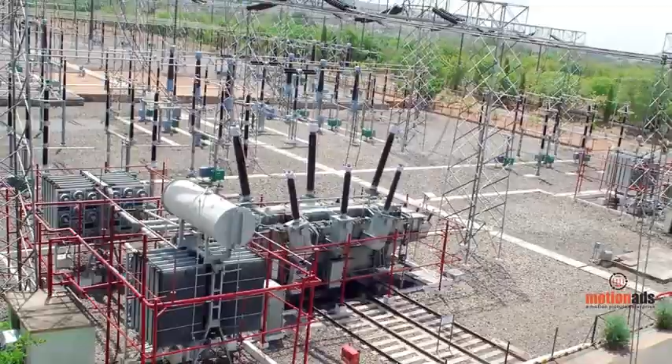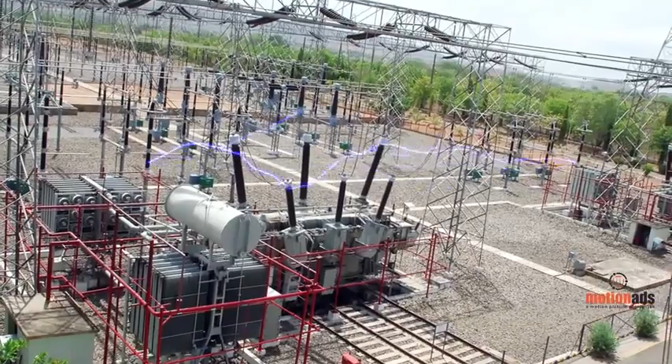India has made spectacular growth in the power sector after independence. Power generation and transmission have increased several folds and are expected to increase exponentially in the future. The Modern Group, realizing the potential of the power sector, decided to invest in this sector to cater to the country's needs as well as international demand.

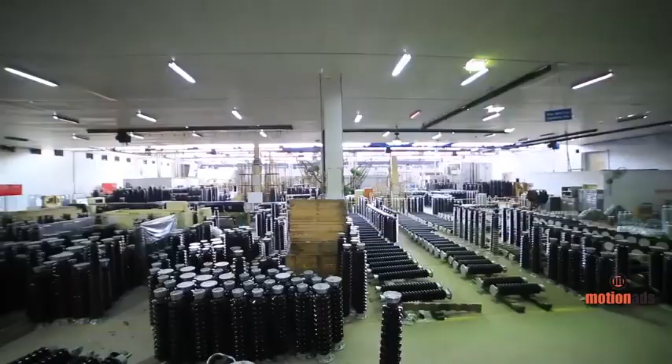Modern Insulators Limited was set up at Abu Road, Rajasthan by the Modern Group in 1985, in technical collaboration with Siemens, Germany, a world-renowned company in the power sector for manufacturing high voltage and extra high voltage vitreous porcelain insulators. Today, Modern Insulators is a leading manufacturer of porcelain insulators in India and competes with the best in the world.

Modern Group is one of the leading engineering and textile industrial groups in India, which emerged on the corporate scene in 1973. The group, led by Mr. Sachin Rankar, has 4 manufacturing divisions: Modern Insulators Limited, Modern Terry-Towel Limited, Modern Denim Limited, and Modern Foundry Iron and Aluminum Metal Castings. The Modern Group has a sales turnover of approximately $100 million.

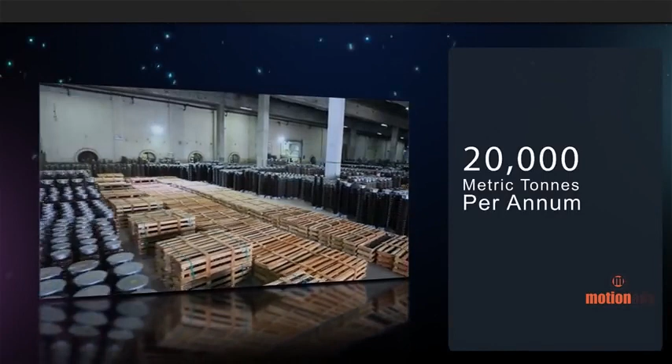The insulator plant currently has a capacity of 20,000 metric tons per annum. The export turnover exceeds $15 million, which is around 30% of the sales turnover. Modern is an ISO 9001 and ISO 14001 certified company.

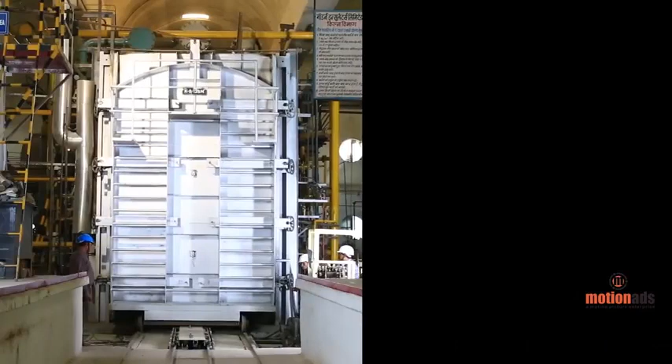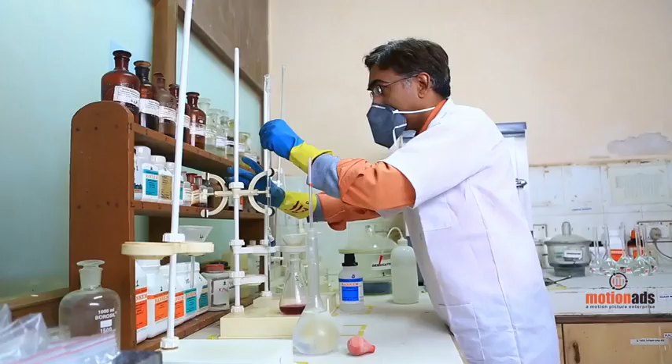Modern has the most sophisticated manufacturing plant, with machinery imported from Germany, along with required testing and inspection facilities. Modern also has an in-house R&D setup recognized by the Government of India for development of new products and process improvements.

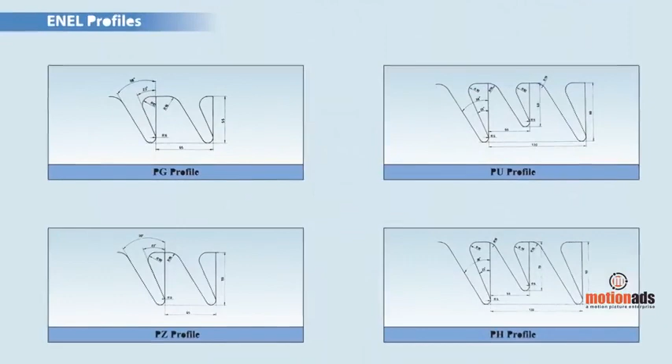Insulators are designed as per various shed profile parameters, which conform to all Indian as well as international standards. Special type shed profiles are also manufactured to meet application of insulators in highly polluted areas. Design and development is done with the latest setup and updated through computer-aided designing.

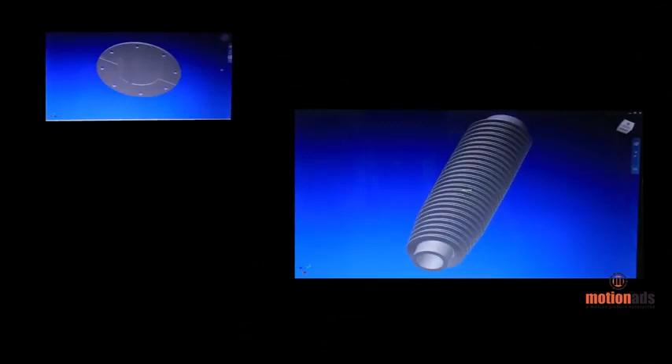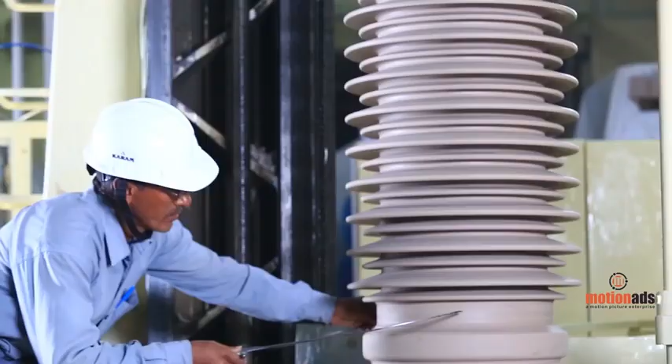Computerized programming is used in CNC machines for turning of insulators. Stringent quality control measures adopted in the entire manufacturing process ensure performance and reliability in service.

Solid core station post insulators are used for high voltage disconnecting switches and in substations for bus post applications as well as wave trap supports.

High pressure, high strength hollow porcelains are used for SF6 circuit breakers and instrument transformers.

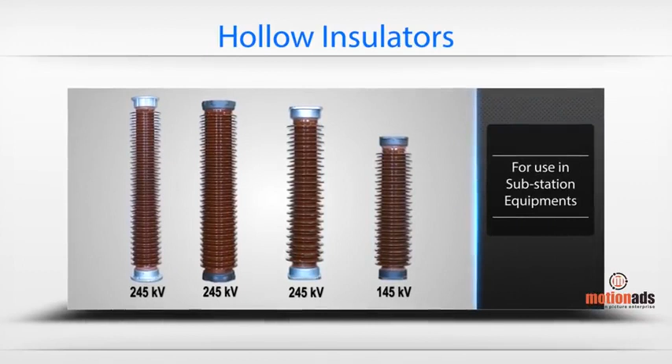Modern manufactures various varieties of 25 kV solid core insulators required for railway electrification. Modern is one of the major suppliers of insulators to Indian Railways.

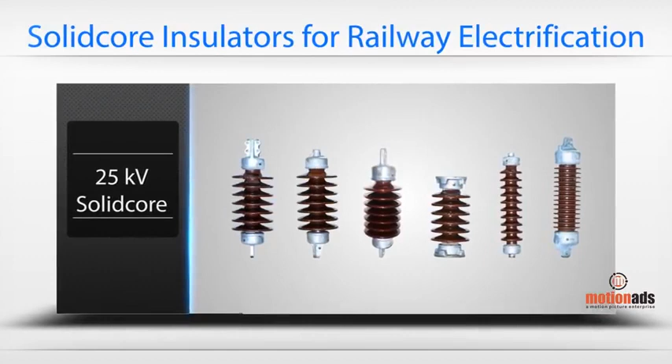Modern also manufactures long rod insulators for overhead transmission lines, which have distinct advantages over conventional disc insulators. Modern is the first company in India to introduce this technically superior product for transmission lines as an innovation in the power sector.

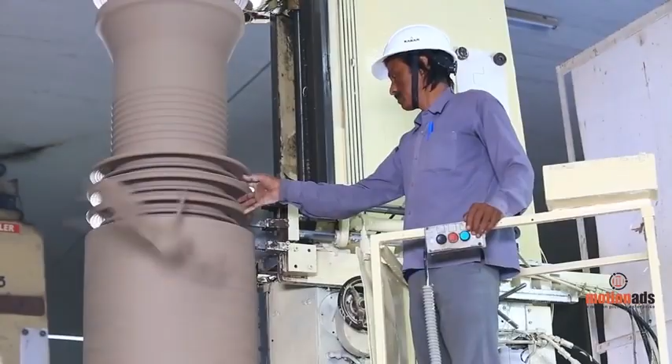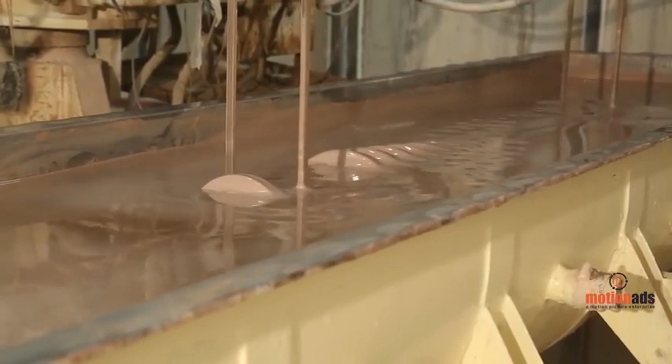Modern has a team of well-experienced, trained technicians and highly qualified engineers who ensure the highest level of quality of vitreous porcelain insulators at each and every stage of the manufacturing process, to meet the stringent requirements of IS, IEC, ANSI and other national and international standards.

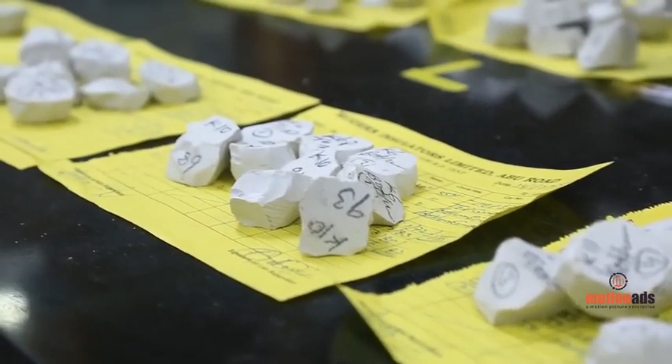The plant receives technical support from many ceramic experts with respect to the latest innovations in the ceramic field. Let's take a closer look at the operations.

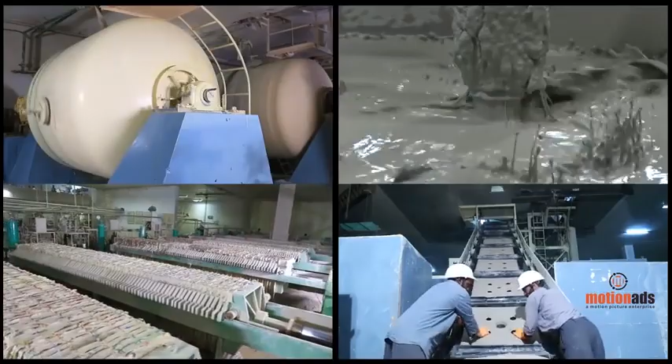Modern manufactures vitreous porcelain insulators with wet process technology. The production process for manufacturing vitreous porcelain starts with the selection of raw materials. The raw materials received from suppliers undergo thorough testing at the in-house laboratory.

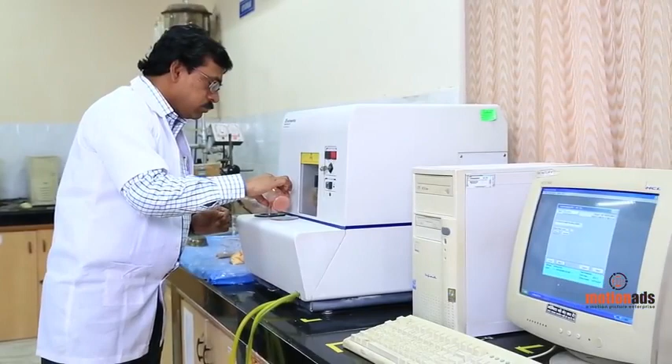After approval, the raw material is charged into a ball mill, which carries out the grinding with wet process technology. Liquid material in the form of slurry is prepared by this process.

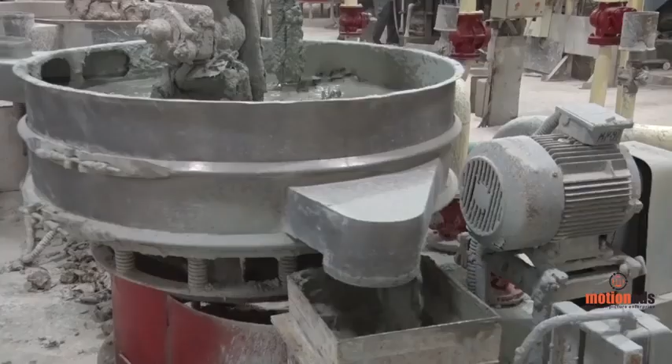Slurry is filtered through a ferro-filtering system to remove iron particles from it and then sent to the filter press. High pressure filter presses are installed for cake preparation. These cakes are then transferred to the pug mill through a belt conveyor.

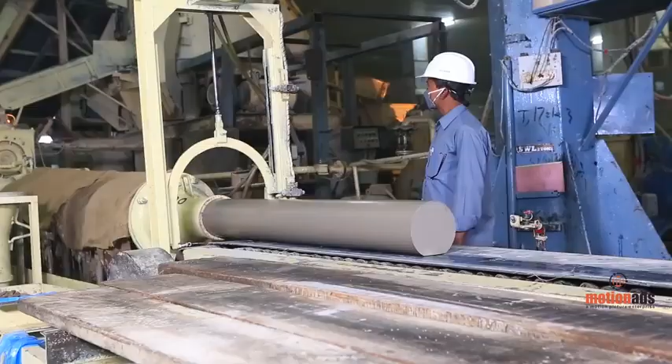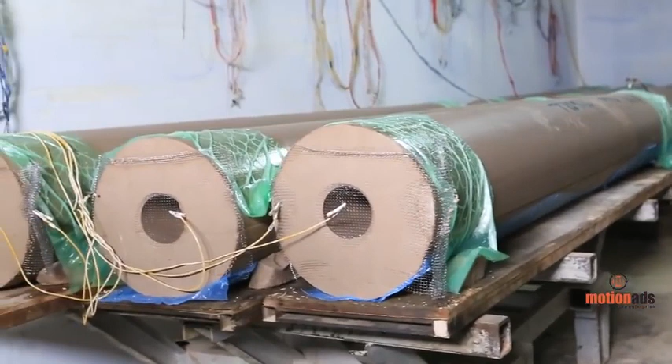Homogeneous pugs are extruded in high vacuum pug mills for solid core and hollow insulators. Pug electric drying controls moisture content, and online temperature is constantly monitored through a data acquisition system in the control room.

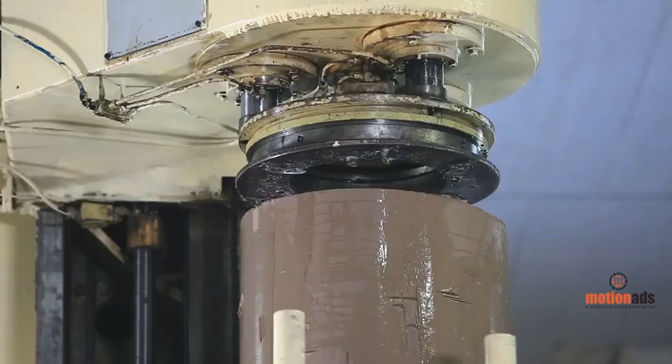The pugs are turned in CNC and photoelectric automatic vertical shaping lathes.

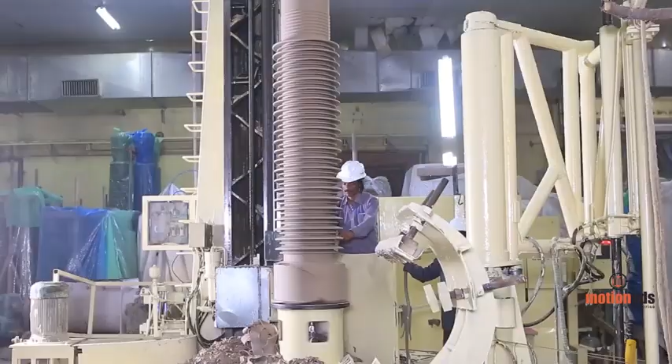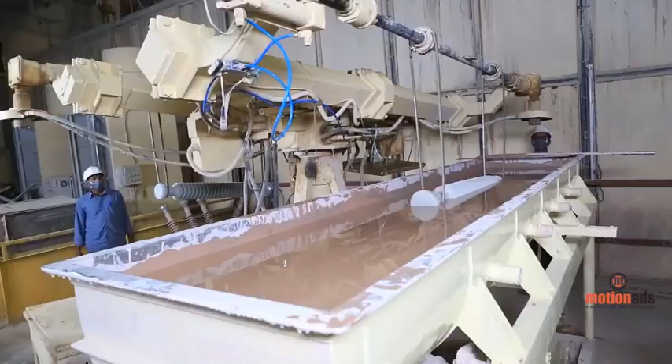Greenwares are dried in microprocessor-controlled dryers. Dried greenwares are then sent for finishing, glazing and graveling processes. The different glazes are tested in the plant's laboratory through glazing in brown, grey or any other color as per customers' requirements.

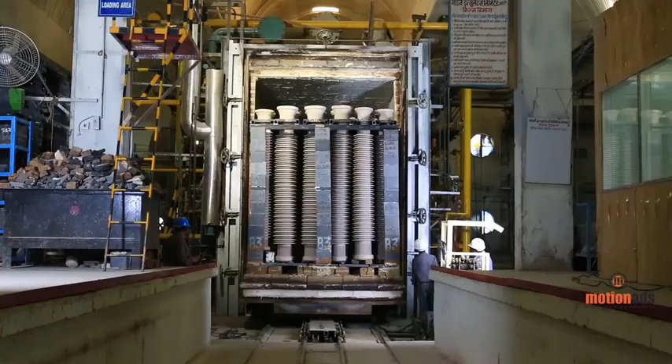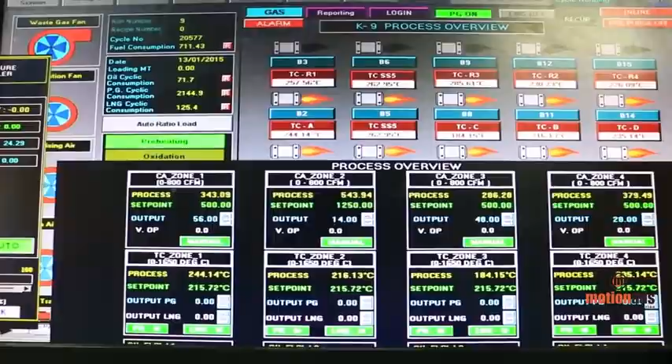Glazed wares are fired in PLC-controlled, gas and oil-fired, auto-operated shuttle kilns with high-speed multi-fuel burners. The firing temperature is about 1230 degrees centigrade. Fired insulators, after unloading from the kilns, are checked thoroughly to eliminate the defective pieces.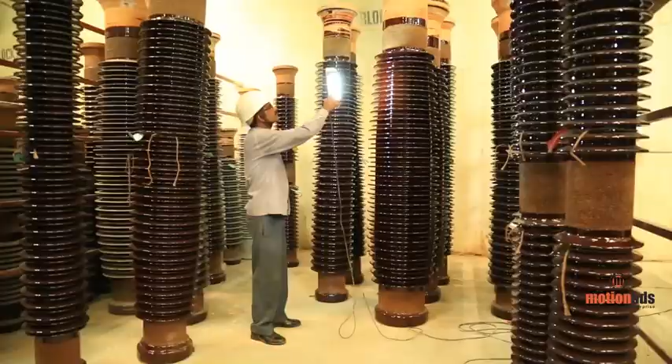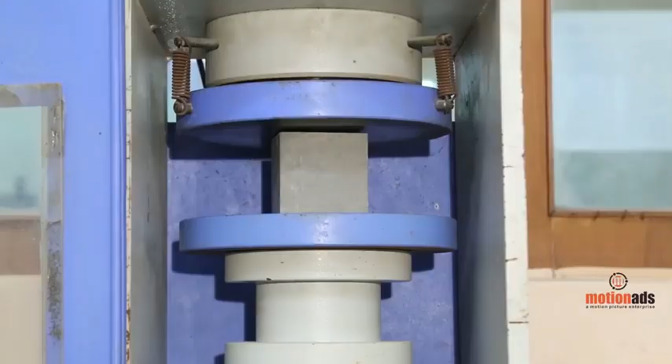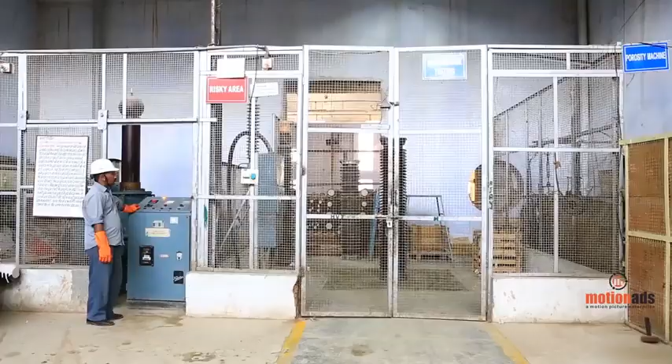The assembly is done by high-pressure injection method. The cement used is of special type, collected from approved suppliers, duly tested for mechanical and other properties and stored properly. Finally, each and every insulator undergoes routine plus special mechanical and electrical tests to comply to customer specifications.

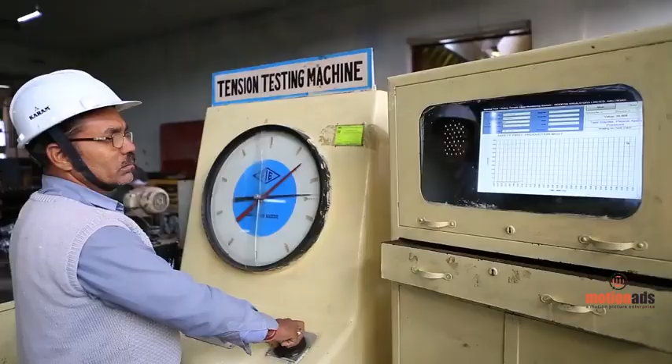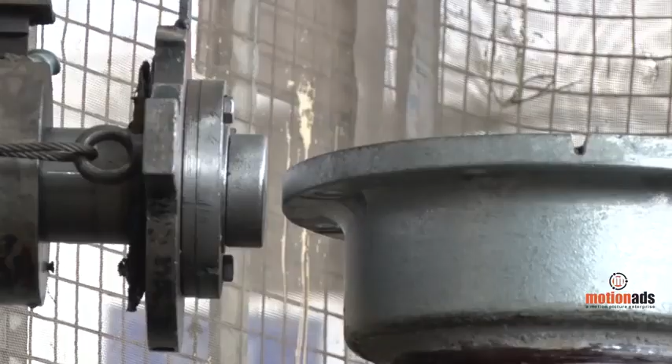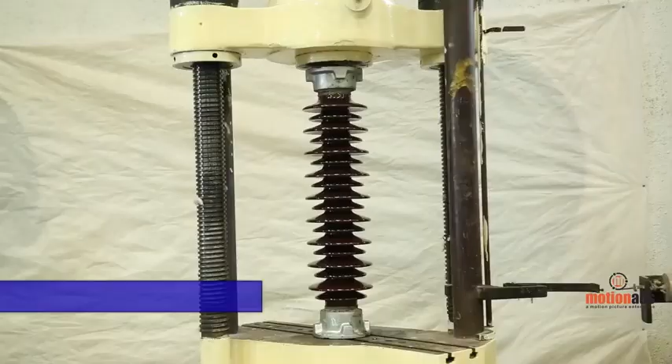Tests include porosity test, ultrasonic test, and routine mechanical test like tensile test on long rod and railway insulators, bending test on solid core post insulators and hollow insulators, and pressure test for hollow insulators. Other type test facilities include temperature cycle test, all mechanical and thermomechanical tests, vibration tests, etc.

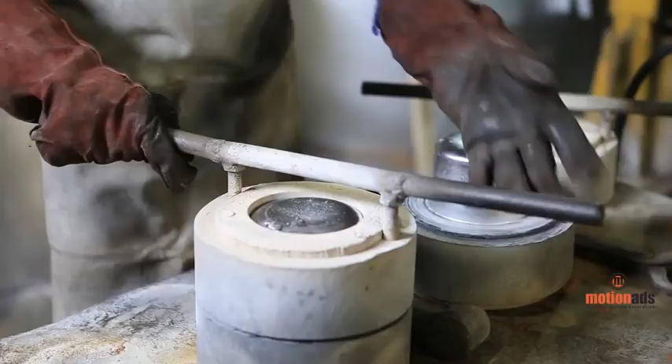Metal parts are subjected to galvanizing, chemical and mechanical tests as per standards. As a part of backward integration, Modern has set up its own metal foundry to manufacture SG iron and aluminum metal parts for captive consumption, as well as to cater to requirements of various different industries.

Modern has a dedicated marketing team and an extensive marketing network in India and abroad. Regular customers of Modern Insulators in India are ABB, Alstom, Bharat Heavy Electricals Limited, Siemens, Crompton Greaves, L&T, Indian Railways, Power Grid Corporation of India, all state electricity boards and various utilities.

Modern's valued overseas customers are ABB Group of companies in Sweden, Germany, Russia, Egypt, as well as Alstom in France, Italy, Russia and USA. Siemens in Germany, Italy, Brazil, Canada and US, and many others.

Commendable efforts by Modern on export development have brought laurels to the company in the form of export awards from the Ministry of Commerce, Government of India for many consecutive years.

Modern takes special care of its employee welfare and competency development by providing internal and external trainings. Modern motivates and recognizes excellent work through rewards and certificates to the teams and individuals. Annual sports activities are conducted wherein all the employees take active part.